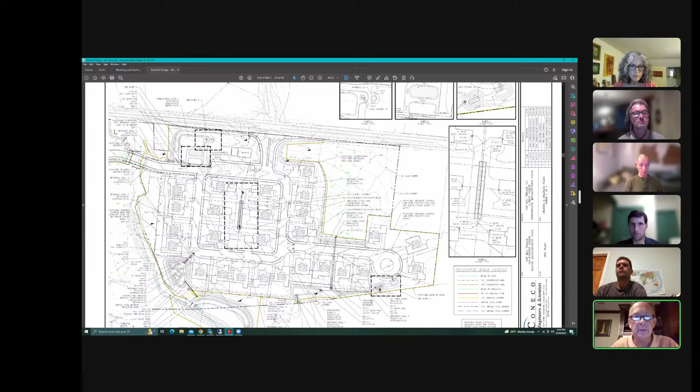Can you zoom in on that a little bit, Megan? So the building flipped such that the far left side is an open patio. Well, that side is kind of part of the brick building, but it has open windows, and then to the left of that there'll be an outside patio. There are some mailboxes there that we've added - kind of forgot about those, honestly. And that is about it for changes.

We were fortunate enough to close out with Conservation Commission after a long stretch, so we're all happy about that. And the orders of condition are getting recorded, so I think we closed that chapter. And we're looking to try and finalize with you folks.

And I think that's it for changes. So Rick, did the conservation vote on this project yet? Okay, so you're just waiting for the written decision, and they voted to approve.

We have the written decision. Honestly, we went to record it this morning and discovered that the original went up to our Westford office, and they haven't received it yet. So whenever we receive it, we'll have to get it back down here and record it at Bristol.

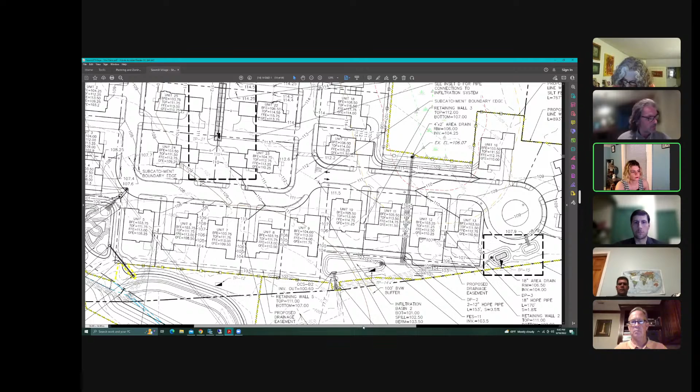Megan, do you want to chime in on that one? We created some access easements to get to some of the stormwater basins to make sure there's proper access. On this side, for example, there is an easement here so that a truck could come by this one, get to this basin, as well as the constructed wetland here, right along the back.

And then on the other side, we have one that they would come right through here, come along the berm, and then we have a drainage easement here, so they can get to this basin.

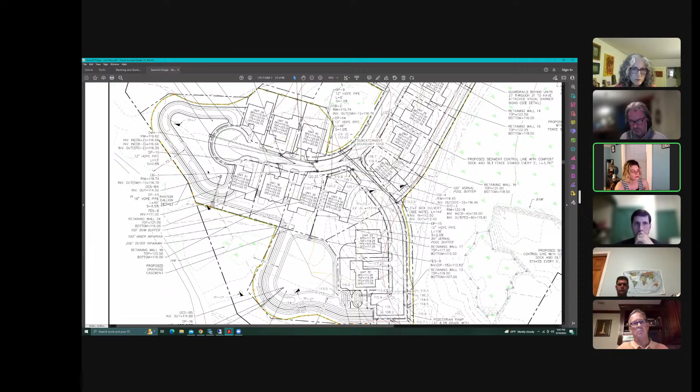Okay, and do we have that plan sheet? Was this a change that came with some of the revised documents after a long period of delay, or has this been changed since the meeting with the Conservation Commission?

We've sent this to the Conservation Commission because they've requested it. We're currently putting it into a revised plan set, so we can upload the same revised plan set to everyone, so everyone's on the same page for a final plan set, as well as the few remaining things that the conservation asked for in their order of conditions.

Right, probably in the final plan set, so we don't have to have so many copies running around, but yeah, that's right, great. That was one of my comments.

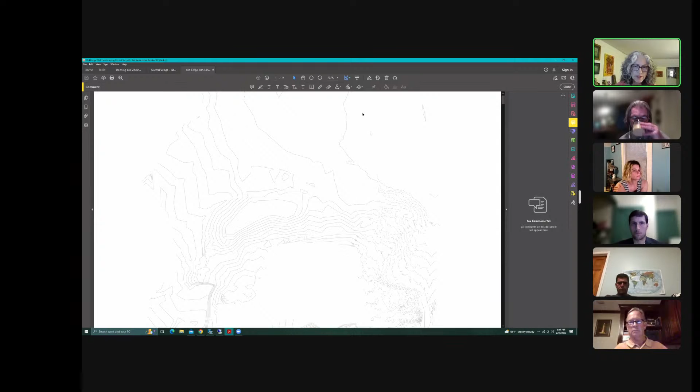If none of the board members have any other comments right at this moment. Rick, one of the things I noticed on the landscape plan, there were a lot of cultivars and non-native species. As much as possible, we'd like to see native species plants. That picture of bamboo is not native.

And I would say, as long as you're pulling up landscaping plans, not to piggyback on Stephanie's question, one of my questions was just to look at more detail at the entrance, because I know last week you didn't have the plan. And then following up, there was a comment last meeting from one of the abutters, and we, on the east side, which we all specifically walked out there and looked at during the site walk. So if you want to just touch base on those existing conditions and what would happen there, so we can check that out.

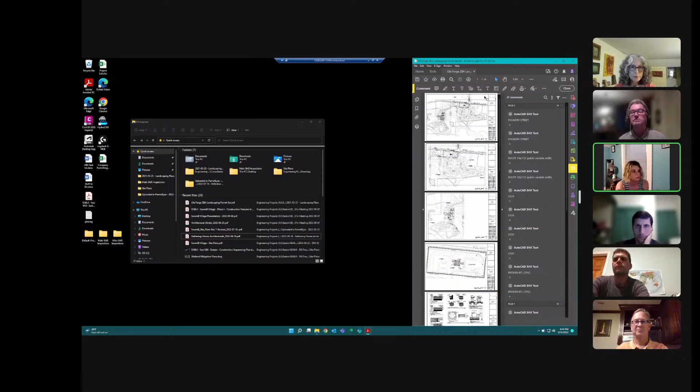All this up here, that's a big bamboo. So on the, let's get one for these. So I believe I don't believe we have an updated set for kind of like with the final clubhouse design, which is smaller than this. So there would be additional landscaping on the side.

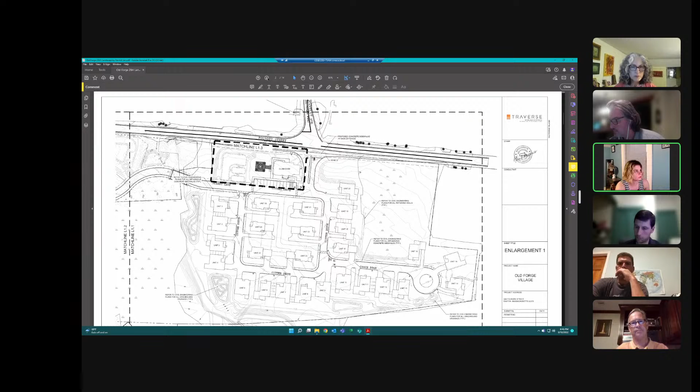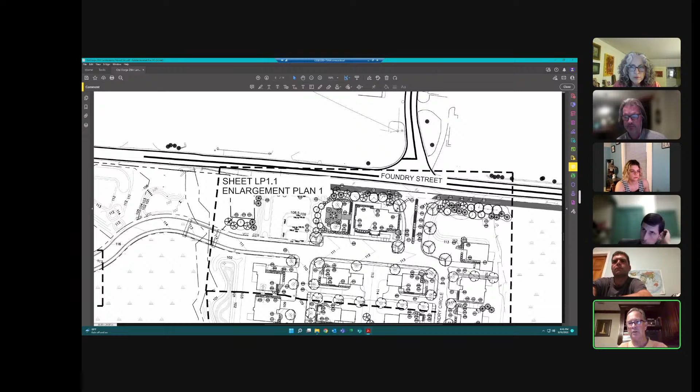So you mentioned this area here, and then is it the bottom, kind of the southeast for the abutter? Can you just zoom in there a little bit more, Megan? Yeah, I think concentrate on the entrance. Greg muted himself, but I think that's what he was saying. Yes, that's what I wanted to say.

Okay, so yeah, if the board so chooses to close tonight, we can, but we'd obviously need to get the footprint revised on all of the plans for the clubhouse or gathering house, whatever you had it called, and also need to label that on the plan that we were on earlier, so it calls out what it is, not a dwelling unit.

So we'll update the landscape architectural plan for the new clubhouse and then substitute for native species. Yeah, native, and I would also suggest, because I think we're starting to see more focus on this, adaptive species. So if there are species that you'd find a little further south in similar environments that people are starting to use to respond to climate change, I think that would be helpful as well, if your landscape architect is familiar with those. They should be. Yep, okay.

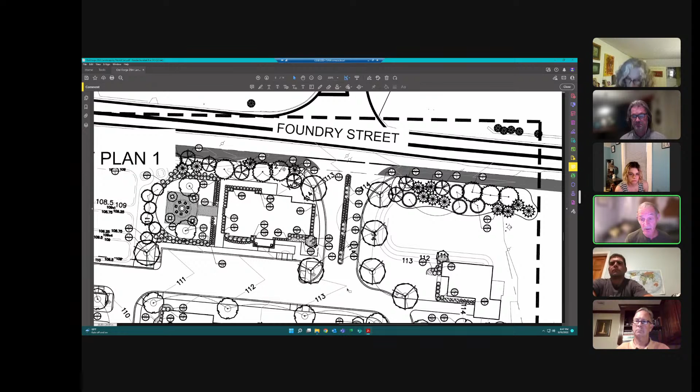Rick, in response to one of the abutters at last meeting, you said there is a plan for lighting, but I was looking through the pages and I don't see anything about lighting. Am I missing it, or is it not there? If it's not there, it's something we want to add.

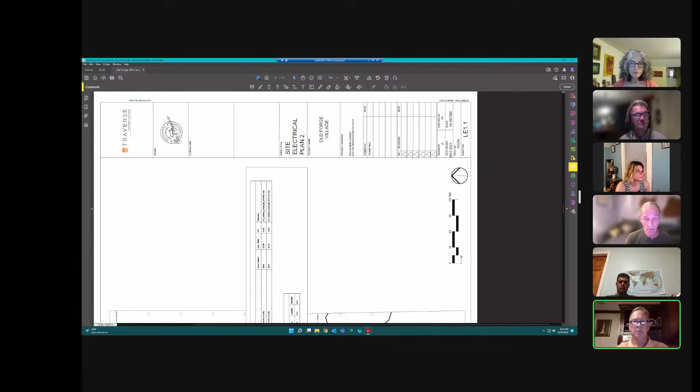Yeah, it's definitely there, Amos. Hopefully Megan can find it. We changed it, as I mentioned before, although we'll have to update that plan as well. I don't see the new hardware on the street lights, but the instruction to the landscape architects was to drop the lumens to under 1500 or below, and drop the color temperature to 2500 or less.

So you need to reflect that on the plans and submit, right? Also with the landscape architect, right? Okay, update the lighting plan.

Amos, anything else? Are the sidewalks going to be asphalt? We asked that question, you didn't know at the time. The sidewalks within the site are bituminous concrete, yes, those are the sidewalks paralleling the street.

Any walkways, where we had the discussion, would be pavers if there are any. And the curbing is granite towards the front, maybe like a Cape Cod berm elsewhere. At the entrance we have vertical granite, as well as over the crossing vertical granite, and the rest of it is Cape Cod berm.

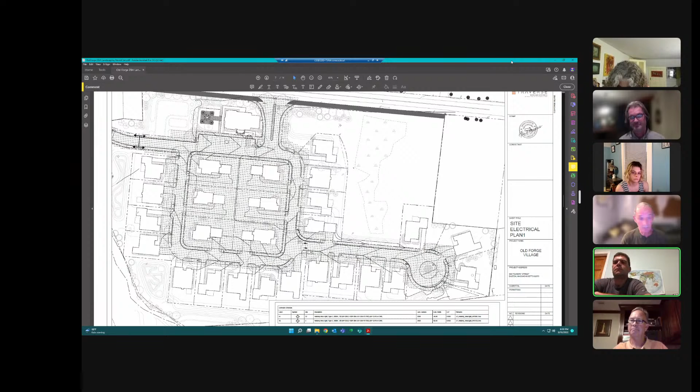Now that you've finished with the Conservation Commission, has the stormwater been fully reviewed by peer review? Correct, Woodard and Curran signed off on the drainage a few months earlier in the year. Yes, they had some comments and suggestions, which would be incorporated as conditions, and we have those. But the approval of the system overall stands.

Peter, do you have anything else? I'm just worried - I think you were talking about the southeast corner where we were out there in the woods, and it wasn't clear if the property line was approximately at the edge of the neighbor's lawn or exactly where that was on that corner. I think we guessed it was close to the neighbor's lawn, but we didn't really confirm that.

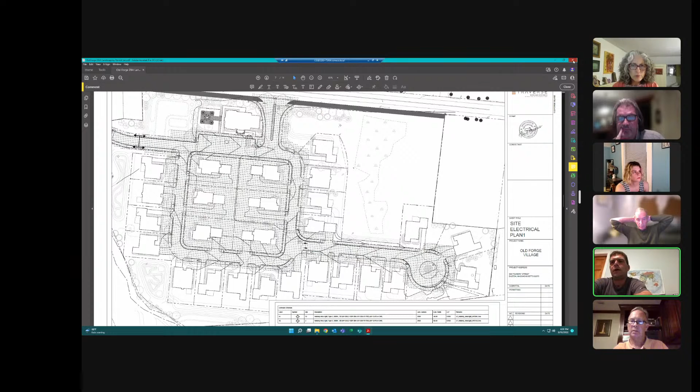Rick, do you have any response to that? I'm trying to think of what plan Megan can pull up. Do you know where we're talking about, Megan? It's at the bottom right, that cul-de-sac, that you can see on the plan. It would be maybe on the property viewer, if you could get the right layer on, you could see the property line as well as the satellite image. I'll see if I can pull that up for us.

So can I just add, I have a couple of other items, but I think they're going to need Megan's attention. But Greg, if I could just - while I'm waiting - always a fan of filling dead air.

Go right ahead. I just want to remind the board that if you close the hearing and vote, you need to vote for the waivers. I mean, if we were to close, we have to vote for the waivers while we close. Well, no, I'm sorry, you need to consider the waivers and there needs to be a vote on the waivers as part of any vote to approve the project. A final approval, okay, yes, so that would be it.

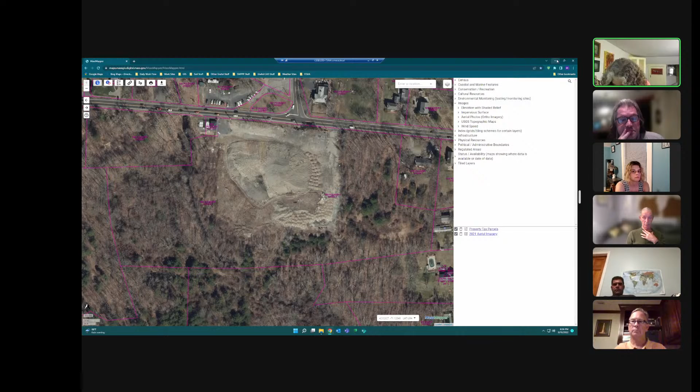I just want to confirm with Rick, I'm showing them on the plan as lot D1 and C2. I think that's the unit type, Stephanie. Oh, also, I thought that was odd. Yeah, that's okay. I think that side of the site, the grades don't change a whole lot all the way to the property line. So hopefully when we get out there and we're clearing, if there's some nice mature trees, we'll certainly leave them.

You actually have plenty of space behind, assuming those, unit 15 and house 16 there, right. Well, if Greg is correct, the only tree that is left is one in the middle of the lawn there.

So are we saying now, because I thought we had figured this out at the inspection, are we saying now that this development is going into that portion of the neighbor's lawn that he appears to be mowing regularly? It appears to be part of his backyard at this point. Is it his backyard or has he encroached? I don't know if we know or not, but it certainly looks like his backyard. Let's put it that way.

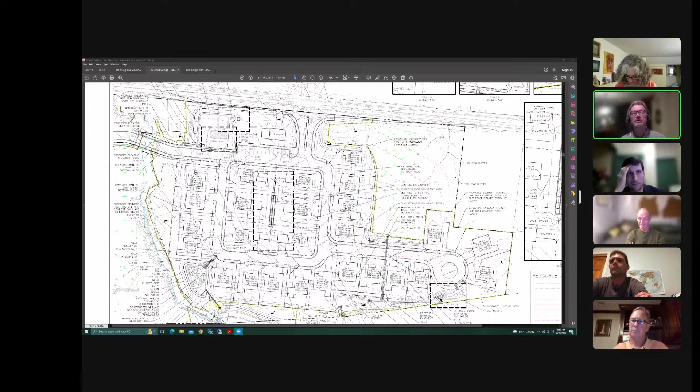I mean, that's why I was saying he's encroaching. So regardless, once this is laid out by the engineers, if it turns out there's no tree cover there, we'll put a buffer in too, even though it's been cleared potentially beyond the property line, to help have a little privacy between the two.

Megan, can you shift the drawing a little bit to the left? Because everybody's pictures are kind of off. There you go. Yeah, it's hard to tell from that.

I think, Rick, the problem is I don't know if this person knows it is the case that we are going beyond that line into his lawn all the way to that tree. According to our assessment, that person is probably not expecting that. It will be good to engage and measure this, to make sure ahead of time that we are not going into his lawn, or what he considers his lawn. It's not his, of course, but I think we need to engage with that abutter.

Well, I think frankly the applicant does. That's not our responsibility. The abutter came to the planning board meeting and brought this up. We took a look at it. There wasn't really a way to see exactly where it was.

As we've done on many projects, once this is cleared, we get out there and take a look. I'm sure Rick, this isn't his first project, he'll knock on a door. Instead of coming up with a prescriptive solution for buffering, let's see what the condition is once construction begins, and engage with the abutter.

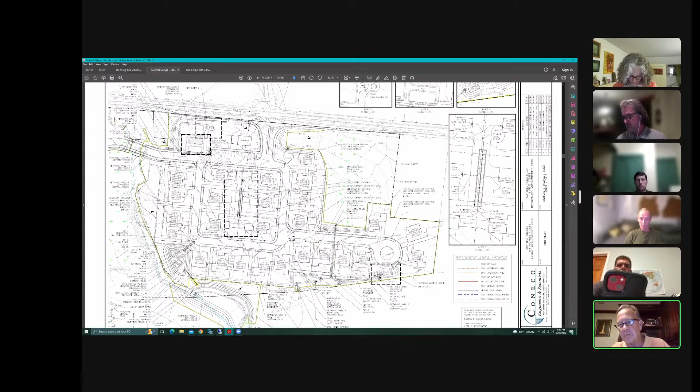Can you zoom in a little, Megan? I don't want to belabor this, but on unit 14, top of foundation is 111, so a couple feet down is 109, and we're at 108, 107 there. If that's relatively accurate, which it should be, I can leave any good trees or brush that's there. I don't think there's any fill going there. We'll need 10 feet or so, 15, 20 feet behind the house, but we don't need to carry it to the property line.

So Greg, I made a note about adding that as a condition. That'll be right, we'll put that in the condition.

Okay, so I just had two other items. Let me just check with the board - any more questions or feedback before I throw it to Stephanie?

No, but I just found the right view on my phone here, looking at the property viewer, and it's not as bad as we were just assuming. We looked at that last week. But again, even those aren't always perfect, so I think it's really better just to go with what we've already said. We don't need to beat a dead horse. All right, go ahead Stephanie.

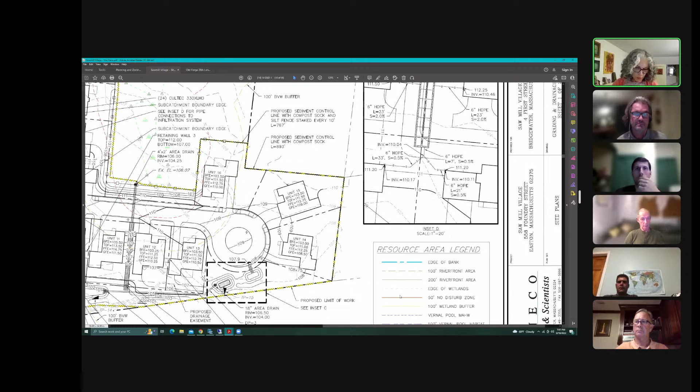Okay, just a couple items. I have from my report that DPW had commented initially, a while back, that sewer line P14 has a severe pipe slope, and that should be revised to include an inside manhole drop connection. I don't know if that was done.

Okay, so P14 right now is at 4.6, which I don't think is too bad. I'm not sure which revision that was on, so there might have been a time where this was a steeper slope. This comment was before the revisions that came in over the last 8 months. Yeah, I believe we revised these within the last revision or two. Because 4.6 doesn't seem that drastic, right?

Yeah, and then just one other comment, I didn't have the detail, but I did have a comment on grading that the applicant should provide detailed construction plans showing how work will be conducted so as not to intrude onto the abutting town conservation land. I think you may have responded to that through your review with the Conservation Commission.

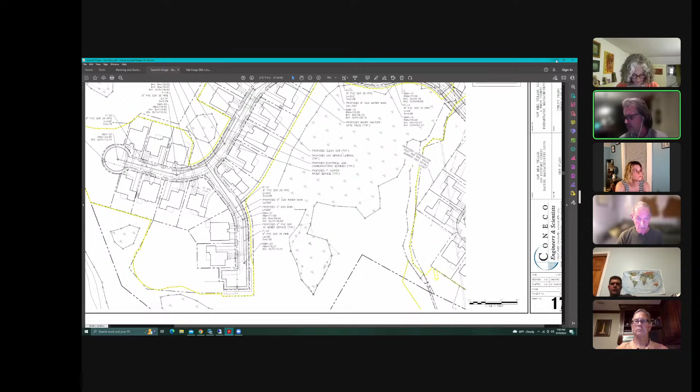Okay Megan, can we go back just to the entry, the plan you had at the beginning, where Rick showed the mailbox location? Because I put on here, label what she's calling that - the meeting house, gathering house, clubhouse, whatever it's called - and the outdoor patio, label that. You're going to revise your landscaping for that. Landscaping at the entrance, we looked at. East property line, we looked at. So, mailbox.

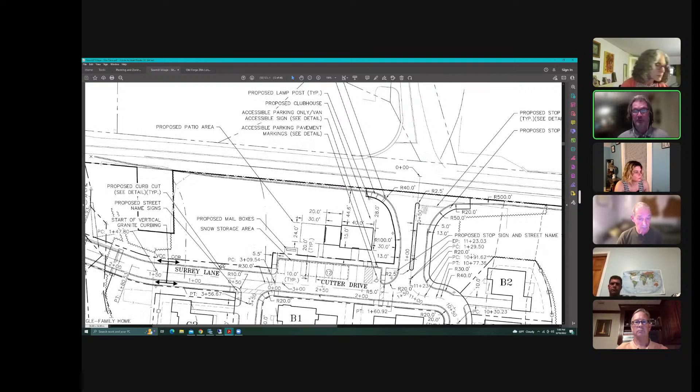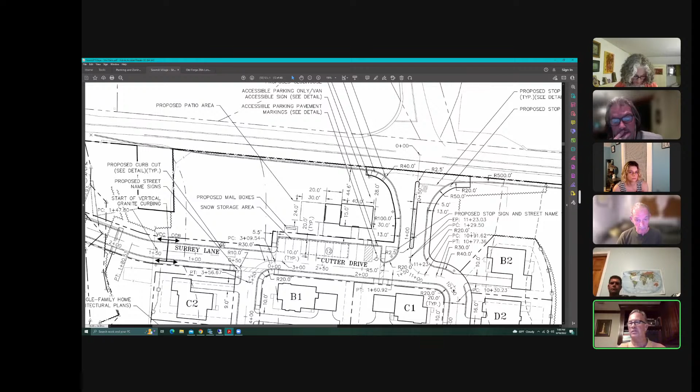That's not gonna work very well, is it? So why don't we talk about it while we're here, come up with one that works better. Because people are gonna want to pull in. Do you want to eat up three parking spaces to do that, or do you think you should put it closer to the road? We could - I mean, in this development, mailboxes aren't as big an issue. That was my first thought, the biggest thing with apartments and housing developments now is just the whole Amazon thing. But here, they'll get dropped off at their house.

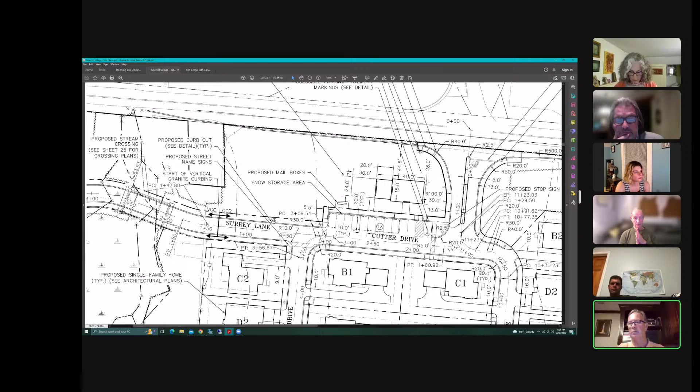I don't know, Megan, do we have - how can I see to the left of the mailbox? Is there a way to widen the road there? Can we put a little pull-over there, or is that - the basin is right there, I don't think we really have room.

And Con-Com's taking this to the square inch of pavement too, right? Oh yeah, the pond is right there. Yeah, the pond is here in this area.

Greg, I think there's a ton of spaces there. What if you got rid of those 3 spaces? Of course you can't see my arrow, and brought that mailbox out - those spaces are, say, 20 feet deep, right? Fill it so they're 10 feet deep, a car can pull in there, get rid of those first 3, and bring that mailbox to the middle of those parking spaces, just change the shape of the curb there.

Something, I mean, we don't have to, it's just something to think about. That's because when cars are pulling in, people want to get their mail and they just want to pull right in front of it real quick, I think. Might be a nuisance. But that's certainly something that can be tweaked and you can just submit it to Stephanie after we have a discussion.

And landscape, better mailbox location, I talked about, the footprint we talked about, and discussing waivers. So Stephanie, does that mean you have a list of the waivers handy? I do.

Are you asking us to vote on each waiver, or just to review the list? To review the list, and then the board can decide if there are any they would not vote on. Okay, so let's do this - Stephanie, why don't you just say each one, and then we'll see if the board has any comments, just like Con-Com does its town meeting. If nobody says hold, then we'll move on.

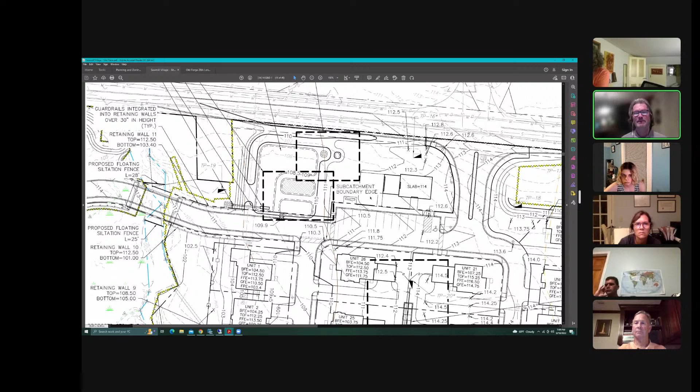You have wetlands and the brooks. And I just want to add for clarity, I know we'll get a question from a certain member of the audience - there is still public access to the green space out there. This was just in relation to what Stephanie had read. Board members, any questions on that one?

All right, next one. 6.1.2.F, vehicular easement. The proponent identifies this as vehicular easements, presumably referencing the designation of an easement at the terminus of the project roads in order to provide access to abutting properties in the future, and uses the same argument as above to support the request for a waiver. So generally, this is where you would require an easement stub off of the end of a cul-de-sac, again for future development, but not only because of the wetlands and Beaver Brook - I think you have one where it would be going into a neighbor's property and the other where it's abutting conservation land.

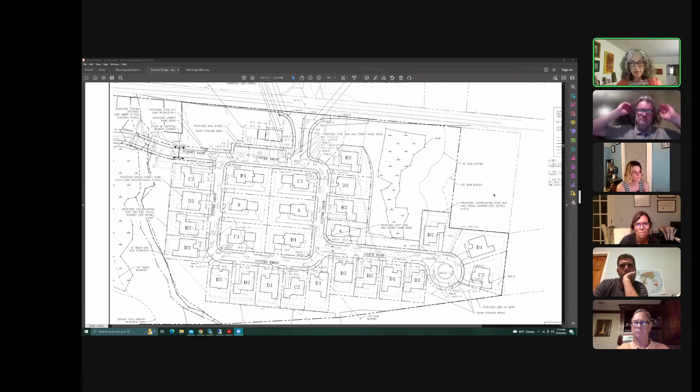So do we need to take a vote separately on the waivers, Stephanie, at some point? No, you can just vote on the whole slate, making sure everyone is aware of it, if no one has any objection to any of them or feels that they should deny any of them.

So before I open this to the audience, the applicant has given his presentation, the director of planning has chimed in, and the board has had opportunities. Does anybody else on the board care to say anything before I open this up to see if there's anyone in the audience? If there's anyone in the audience with a question or comment, please raise your hand. And there's one, Dale Kerster.

Hi, Dale Kerster, 21 South Street. Briefly, just to what Greg mentioned earlier, my understanding is that the expected approval of this will confirm the public's right of access to get to the open space from the private ways within the development, and I just wanted to confirm that that will in fact be the case.

Mr. Lincoln, would you like to answer that? Yes, it will. Great, thank you very much, appreciated. Thanks, Dale. Anyone else in the audience?

Okay, so I don't know, if we were to close this, I know there's a couple things that need to be revised on the plan, but I don't see any reason why we couldn't close it. Do you agree, Stephanie, with that? I agree. All right, so Mr. Lincoln, would you care for us to close the public hearing? Yes, please.

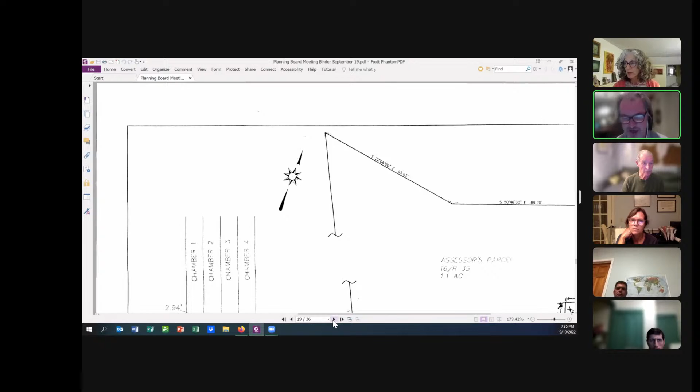And so I'll just piggyback on Deb's a little bit because she's right. It's not our purview, but if you have any common walls, there are a number of things to do with fire code that you'll be required to do, but that's the building department, not us.

What that used to be, Greg, was the old storage facility for the hay for the carriage house, which was the barn in theory. So that's just raw space up there right now. There's nothing up there at all, but it is accessible from the garage through the garage door. It's not developed property up there, just raw storage for hay.

Okay, so in the future, if for any reason the building inspector required a separate egress for that, you'd have to go before historical for any exterior changes since it's in a local historic district. Correct, and you'd have to circle back here because, being a special permit, we do have purview over exterior design, so we'd want to see that also.

We chatted with the historic commission, and they didn't have any problem with the structure, the construction was already done, the occupancy permit was already issued. We weren't going to change the facade of the structure at all at this point. All we were looking for was a special permit to convert. So there is no building permit being pulled, I guess, is where I'm going with this.